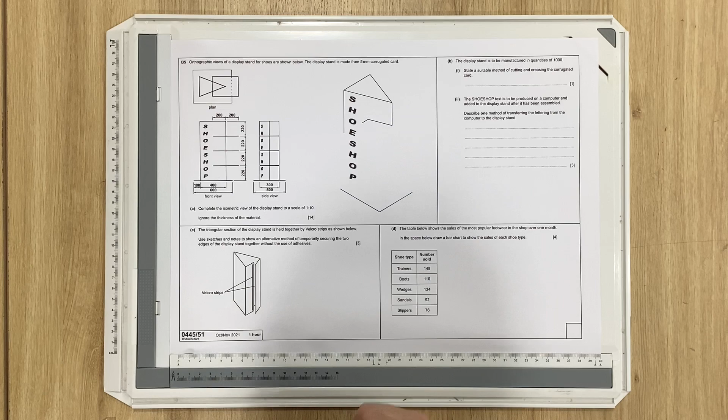So we're just going to do a line sketch of it, a line drawing. It's 1 to 10, so everything is 10 times smaller. The easiest way to do that is just to knock a 0 off each one of these.

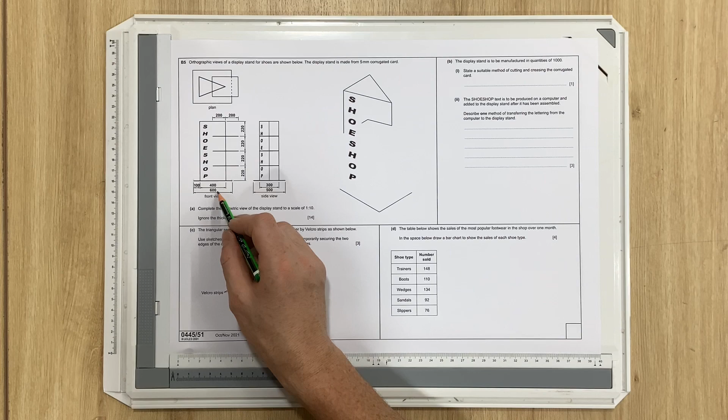So we've got it started here. We can look at the different bits and see what it is. For a start, I want to complete the base, the outside of this first of all. The base part is a rectangle and it's 60mm long. If I measure the line that's already there, I can see it's a bit short.

So I'll put a construction line in first, make sure it's the right angle - there we go, 30 degrees. I can continue that along and put a mark at 60. I'll do a lot of this very faintly to start off with.

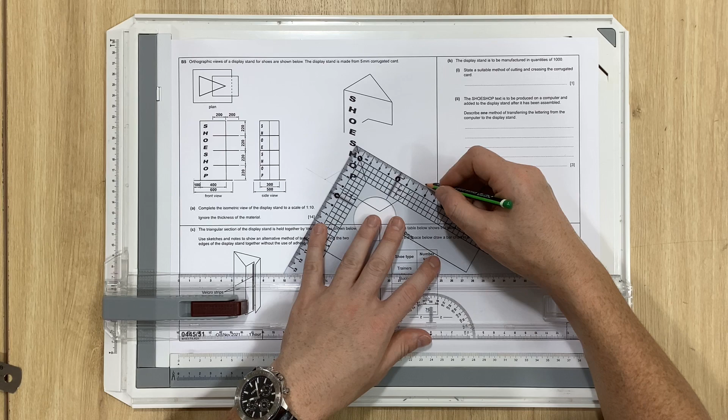This front part we can see is 500 wide. Again I'll check that line - I'm guessing it's not going to be 50, which it isn't. So I'll put a faint construction line in and put a mark at 50, faintly. So there's the base bit first of all.

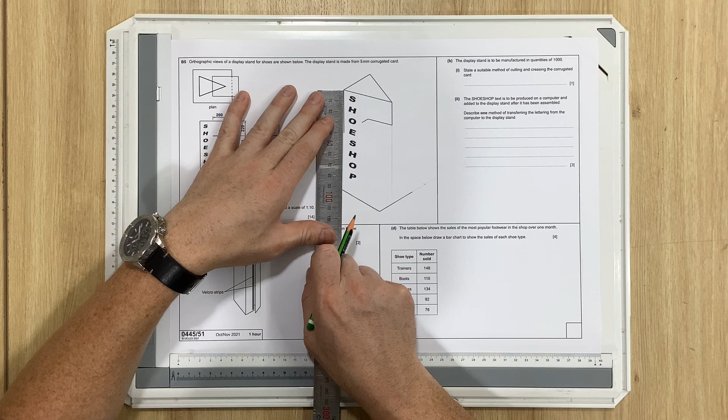Next thing I do is the height of this bit, the height front and back. We can see each one of these is 22mm, so 22 times 4 is 88. I'll put a construction line on the front and the back, and we want to go down 88mm.

I can then do the front bit as well because we want those bits to be parallel. So I'll measure 88 here, and join these two together. I'm not going to do any heavy lines first of all, because we've got a lot of bits to put in here.

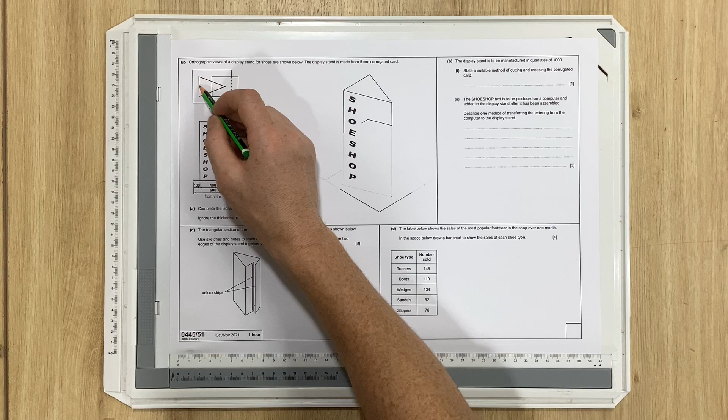We can see from the top that it is hollow inside, so we're going to put a little line here, because the cardboard is folded up, so we've got that bit.

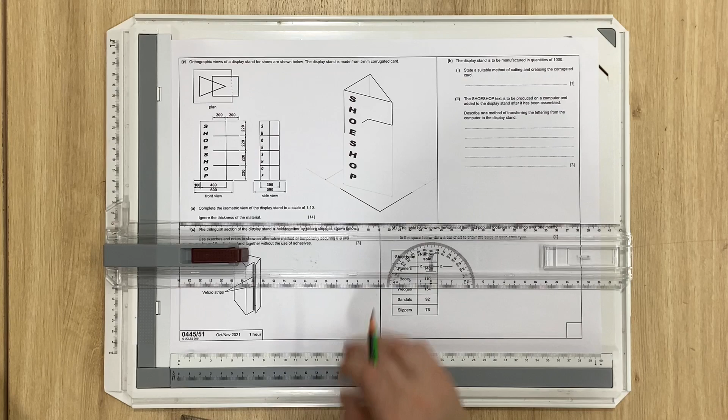This next part is the tricky bit. We've got these shelves that go in 20mm and stick out 20mm at the front. From the front here we need to go along 20mm. If I get to my 30 degree line, I go in here - I'm assuming that's in the right place, but I'll check it. So 20mm is there, and if I put this on there, I can see that's in the correct place - that's my centre line for this.

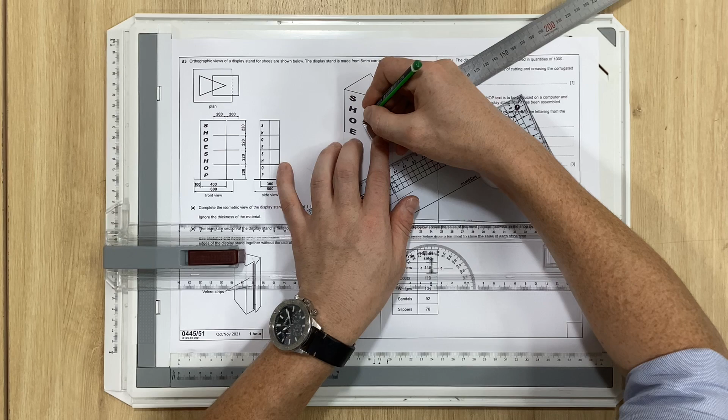According to the plan these are 300 wide, so we need to go 150 this way, 150 that way. I'll put a faint construction line on, and we need to go 150, so that's 15mm, and that's at the end of the bit there. They've actually started that one for us, so I'll go the other way as well - it's 15. You can't see it because it's inside the bit, but we'll mark it there anyway.

So we're now going to come out the front with this first bit and come along here. We said it's 200 in, 200 out, so it's 400mm in total. I'm going to go along 400, put a mark, and go along this way, and I've got my mark from before, so I can join those bits up.

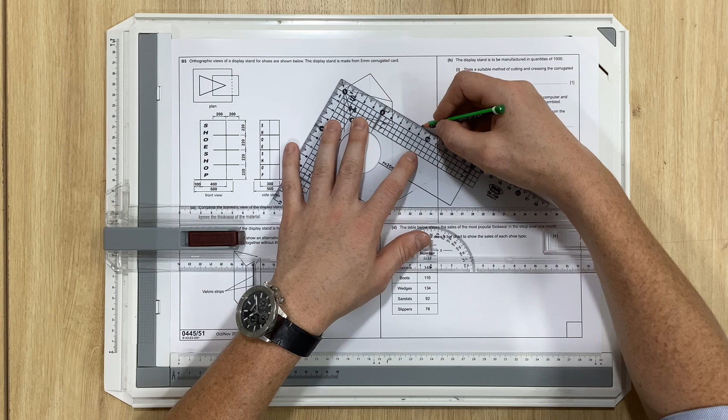So that's my top one done. What I'm quickly going to do, because this is the top one, is go over it heavier, because everything below - nothing's going to go on top of it. I'll just go with that bit heavier as well. So that's our first shelf done.

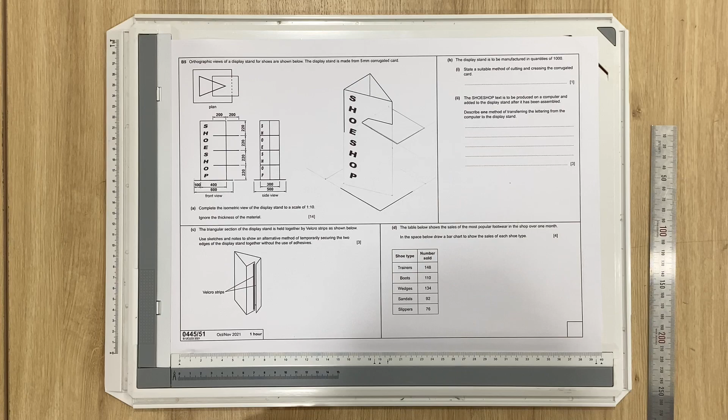What we need to do now is go down another 22mm. If we go down 22 from here, that's the next point there. Because that's not at a 30, 45, or 60 degree angle, I go a line down here, and then down 22 here. So we're drawing this bit with the next part below - I can join these two bits together, and that marks that.

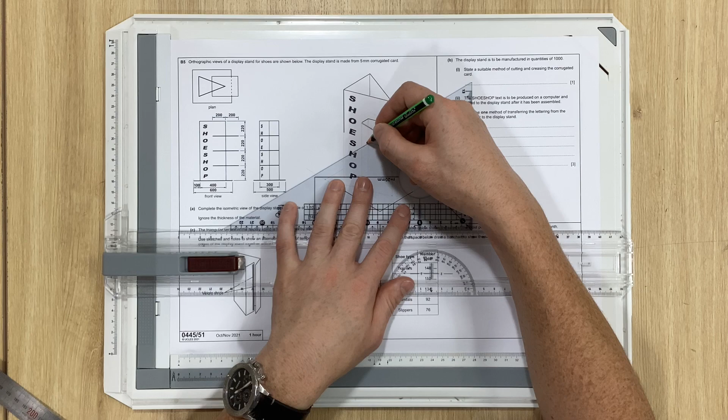From here, all three of these shelves are in the same spot, so I can go a line down here, then a line down here and a line down here, then join those bits up. With this bit here, that's going to come out here off there like that one did, and then I'm going to follow that line along - this is going to go to the edge here, then back along to here, then back in. Again I can do this one heavier because I've done all the bits above.

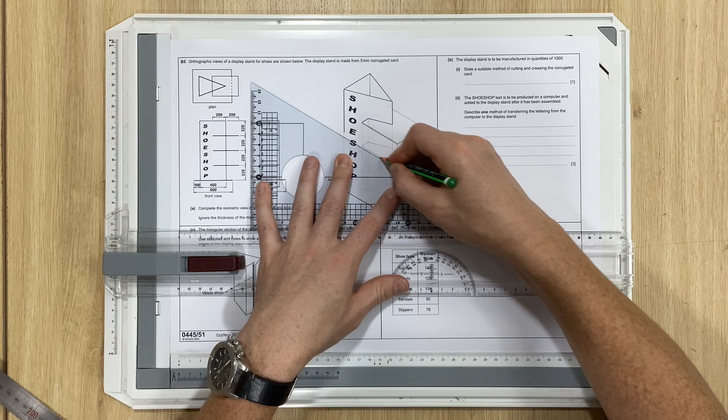So go along here, along here, back to there. I'll do this bit here, and then finally that line I drew before, I'll join that up.

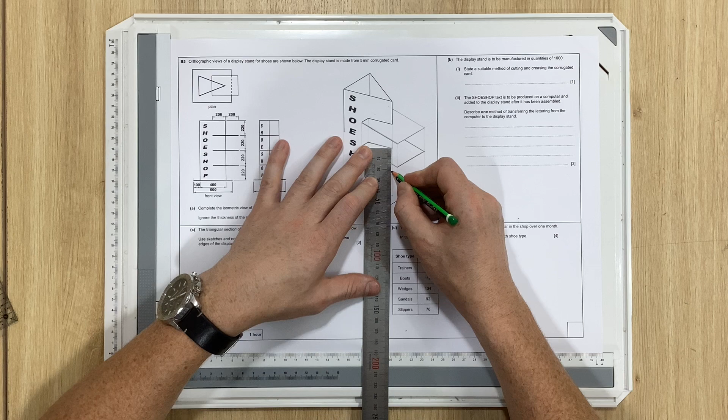The next one is another 22mm down. I go from this spot here, go down 22, and do the same here down 22, because I want these to be parallel. I'll join these two together, and we'll do exactly the same as we did the one above.

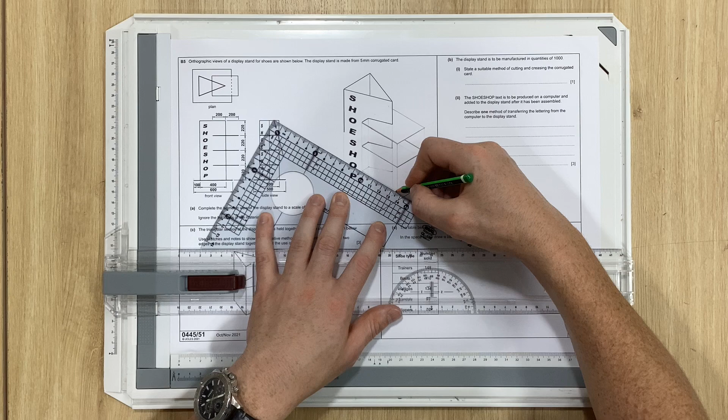We've got a bit there, so I can go along here, out to the front, back here, and back in again. Again I can go over these heavier because I've drawn all the bits above.

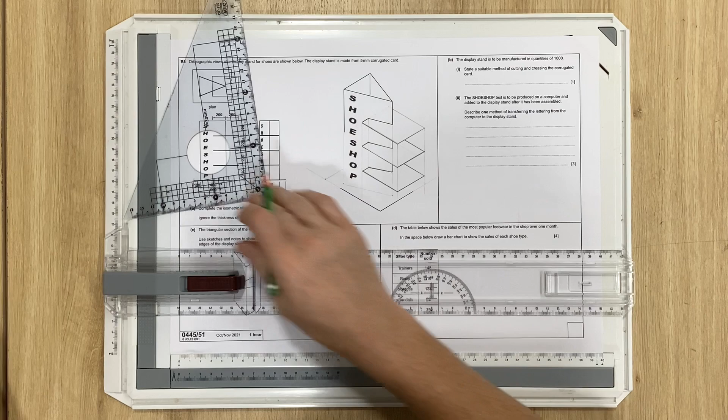This bit here, I'll get my rule, put this bit here. Right, so the last thing I'm going to do is that base part I did before very loosely - I'll go over those bits heavier. I want this bit here, finish this line off. I've got a little line here, and here, and finish off the side of the box.

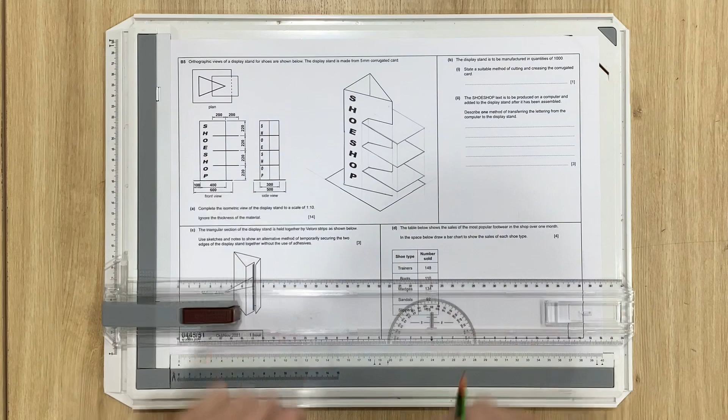And the last little line I'm going to do is this one here. Oh, missing one little bit - that little line there, just go with that bit. And that's it, complete.